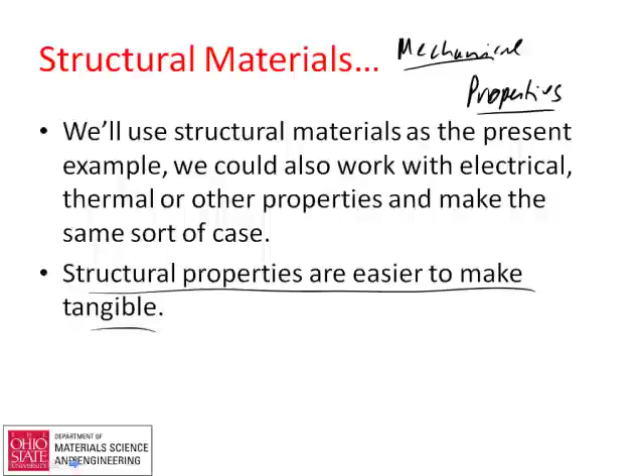Mechanical properties—but we could use other properties too, like electrical properties, catalytic properties, biological response of something. Mechanical properties, I contend, are something everybody has some hands-on feeling with, and as a result it's something you can get into intuitively and extend later on, more like graduate work probably. So structural properties are easier to make all this stuff tangible, I believe, which is why we'll focus on this in this course.

Out of this lecture and the exam that follows, there are really three ways we can define the strength of a material. By strength we mean resistance to physical, mechanical loads on it. There's resistance to elastic deformation—this means, is something stiff enough? Is it going to deform? Is it going to be too floppy, or is it going to be stiff enough? This refers to reversible deformation.

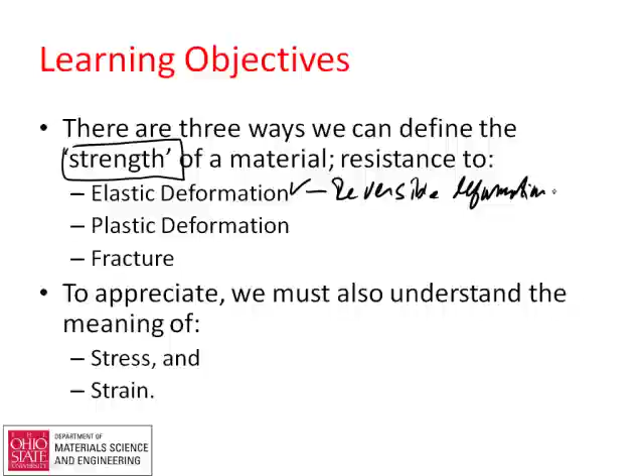The other is being strong enough, which is resistance to plastic deformation—here we're talking about permanent deformation. And then fracture is the other one.

You can see all of these things in the context of something simple like a paper clip. I can take a paper clip and bend it, and if I don't push it too hard—if the wire is very thick, it might be very stiff; if it's very fine wire, or made of plastic, it might be very compliant. If it keeps snapping back to its original position, that's elastic deformation. If we bend it too far and it doesn't come back, that's plastic deformation. Those are two completely different definitions of strength. And the last one you're all familiar with: if you push on something too hard, it's just going to break—that's fracture.

The important thing is these all have different rules that govern the behavior. As engineers, we can write these into quantitative rules, and those rules are different in all three cases. We're not going to get into depth, but I want the idea that elastic is different from plastic is different from fracture. The other thing to appreciate, if we're going to be quantitative about it—and that's what we try to do at the university level—is we have to give real physical meaning to stress and strain, because that's the language we use to be quantitative about any of this.

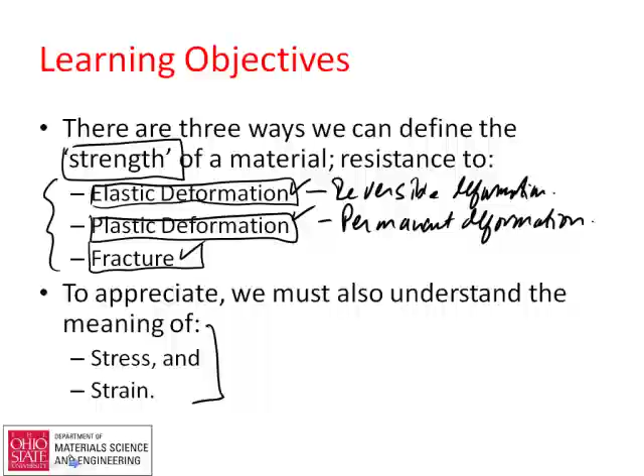Okay, so let's go forward. I want to put this in the context of the 794 class, and develop some goals that build on what we do later. This might seem a little abstract right now, but bear with me, because later on we're going to consider how we can tailor microstructure to give us resistance to plastic deformation—that is, how do we make strong materials? And that's really an interesting topic: how do we make materials strong?

That will be one of the upcoming lectures. The other, I'm going to put into the context of how we make an automobile body, something everybody can relate to.

There's a lot of demands you put on an automobile body. If you want something like a Porsche or a Ferrari, it's got to be really stiff in order to give you good performance. That's not quite as important for a getting-to-the-grocery-store kind of car.

But even for a getting-to-the-grocery-store car, you care that it's crash worthy, meaning it protects the occupants inside if there's a crash. There's a lot of materials properties that go into that.

We also have to have things that are affordable, so manufacturing processes get into that. And we also have to have something that's going to last a long time, so things like corrosion, fracture, fatigue, and all these ways things can degrade go into it.

Something like a vehicle body, which could apply to a bicycle or airplane just as well, brings together a lot of these things, and you can see exactly how the science folds into that. Later on, we'll do another lecture to see how all of this fits together in the context of sustainability.

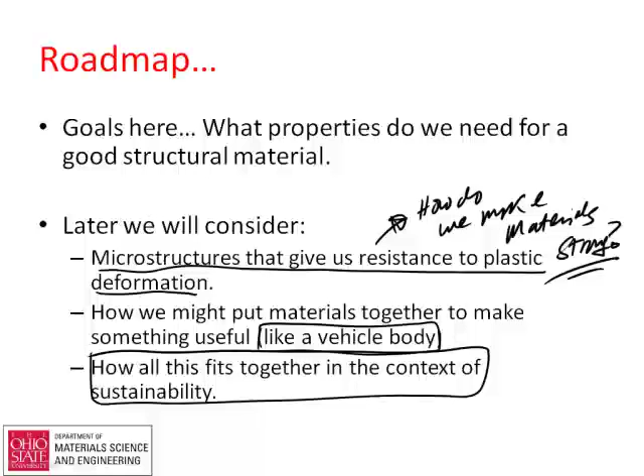One really interesting thing is that if you make a car lighter and lighter, it'll probably burn less fuel, but it also becomes fairly expensive. We'll try to put all of that into a context of sustainability and see how engineering really does treat sustainability in a very first-order way.

Okay, in terms of the goals here, let me do one more slide before I get to that. In the context of something like a vehicle, if you're going to make a bicycle, an automobile, or an airplane, you don't want to carry extra weight around. So for any of these things, a goal is often to minimize the weight or mass of the body while meeting structural objectives—meaning it's stiff enough, not flimsy.

If a shopping cart bangs into it with a light force, it's not going to give you permanent deformation, doesn't dent easily, or doesn't fracture. So failure modes include excessive deflection.

This is really resistance to elastic deformation. Permanent bending is resistance to plastic deformation. And then resistance to fracture is just fracture, or sometimes this is something we call toughness.

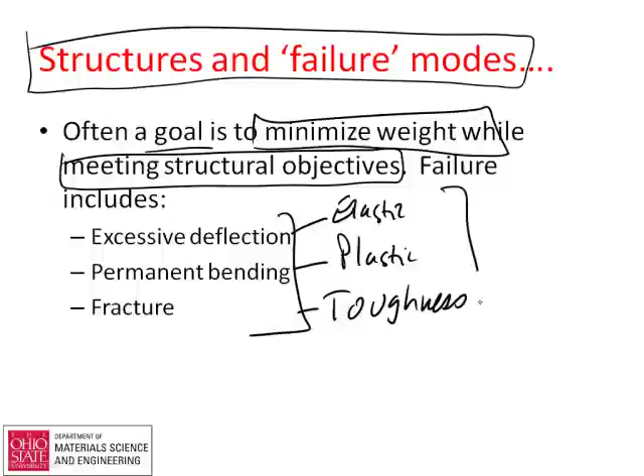You'll see all of these words a little later in the lecture. We'll go through that a little bit more carefully going forward.

My goals with this particular lecture are relatively modest. We could easily build this up—you could do actually several weeks probably on this topic and consider how to minimize weight and how to maximize robustness. There's all kinds of things you could do that I really think are tangible for the students.

If anybody would like to develop something like that, I'd be very happy to get on the phone with you and discuss some ideas where you could do this with different kinds of metal. For example, just to foreshadow this, you could consider aluminum versus steel.

Aluminum has about a third the density, also about a third the stiffness, but it turns out in bending that makes the aluminum behave much better than steel. And also aluminum is something you can buy very easily.

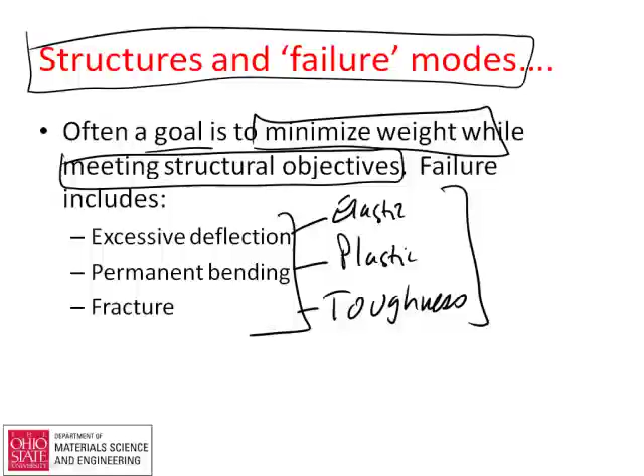If you go to McMaster Carr, you can pick, for example, the thickness you want, you can pick the strength, and usually you can get it in like a full hard temper, and then you can take a torch to it, make it very soft, and you'll see that the plastic properties change a lot and the elastic properties don't. But I think I'm getting kind of way ahead of myself, though I do want to foreshadow some things if you want further information where you can go.

So if you do want further information, I'm going to take you through—I've got a couple things set up on my web browser here, but there are good links. The ASM Teacher's Handbook is outstanding. There's also a Pacific Northwest National Lab Handbook on composite beams. I'll show you where those are.

There are two resources, or there's a great set of resources out of Cambridge University—this DoITPoMS, the Dissemination of IT for the Promotion of Materials Science, out of Cambridge.

I've got two full modules I'll show you, plus a module on a tensile test. Other things you could Google to go further are stiffness and shape, section modulus and shape—there's some really deep stuff there. This would be kind of advanced at the high school level, but I think it would fit very well if you're talking about design or building mechanical stuff at all. There's a lot of great stuff you can really get your hands around. If anybody wants to do that, talk to me offline and I'd be happy to step you through it.

So let's go to Firefox. What I'm going to go through here first is the ASM Materials Education Foundation. If you put ASM Education Foundation into Google, it pops right up. We can go there, and that should also pop right up. If you go here, we can scroll down to educators, go to teacher resources, and there's some pretty good things here.

Two in particular I'm going to point you towards. One is the STEM handbook—this is basically what you get at the teachers camp, and it's available in digital form as well. How Everyday Things Are Made is a really good one. Here's another one from Pacific Northwest National Lab that I'll show you in a second.

Let's go to the STEM handbook first. What we can do is go to composites. Again, this is the same way it's done in the camps: solids—usually metals, ceramics, polymers, composites—is the way it's organized. Go to composites, and in here there's a section on how you make the strongest beam and elastic modulus, and today's lecture basically builds on that content.

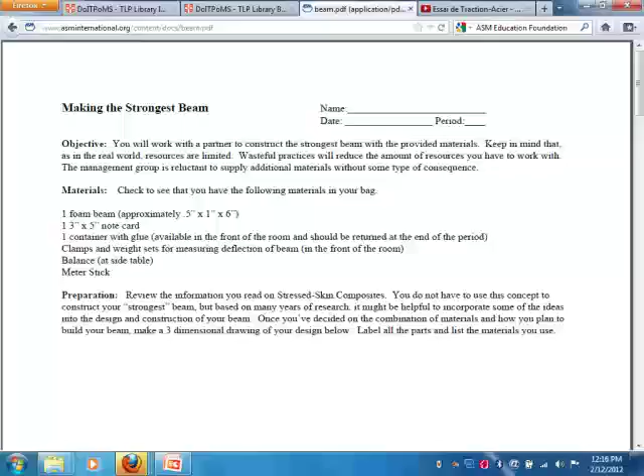That should be loading up any second now. Usually this is a good time to banter with a class—it doesn't work so well at a distance. So anyway, there's this lab on how you can make the strongest beam. This is all written up already.

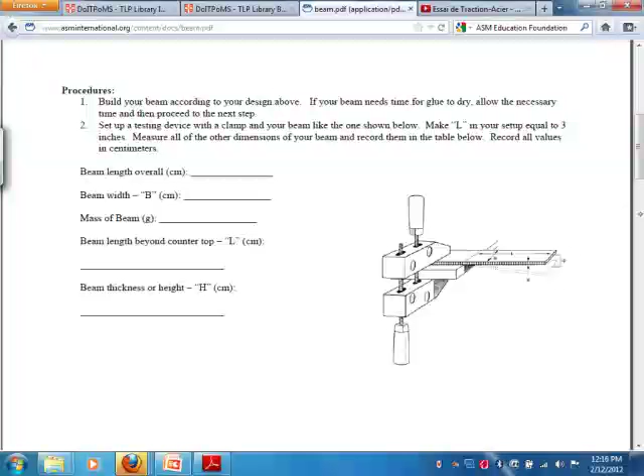Basically you use something like this—I'll show this in a bit. We can look at elastic deflection: if you have a beam like this, how far will it deflect and recover? Plastic deformation would be if it doesn't recover, and we can go through that. Then also at the end of this there's some stuff on stressed skin composites that you can go through as well.

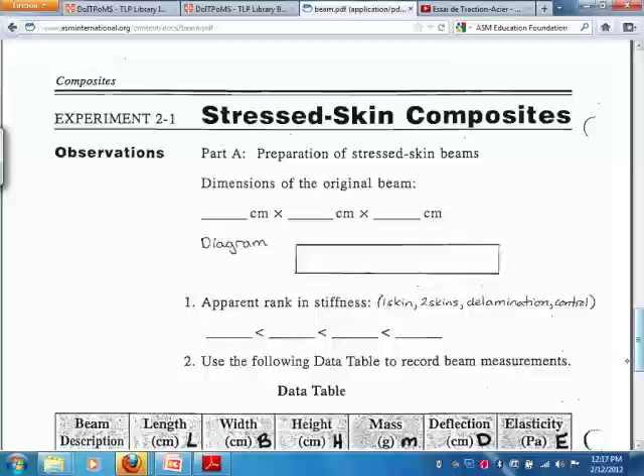So this is pretty good. It doesn't give quite as much background as I will, and there's actually a bit better background given in the Pacific Northwest National Lab set of handouts. If you go to section 8, which I believe is on composites—I just looked at this before this lecture—it does a better job of integrating theory into the experiments, although I think the other book gives experiments that are more practical for typical classes, since that was done more by high school teachers. This one was done by lab guys, and I think you need input from both.

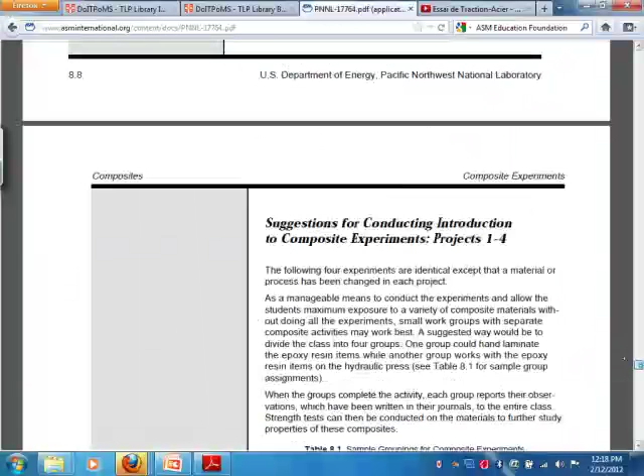So anyway, that's the preface. But if we go down here and look at the table of contents, the important part here is probably composites. Stressed skin composites comes in around 8.16, and we can go down and find that. Where are we at here? Section 8.8—okay, so we can step more slowly through this.

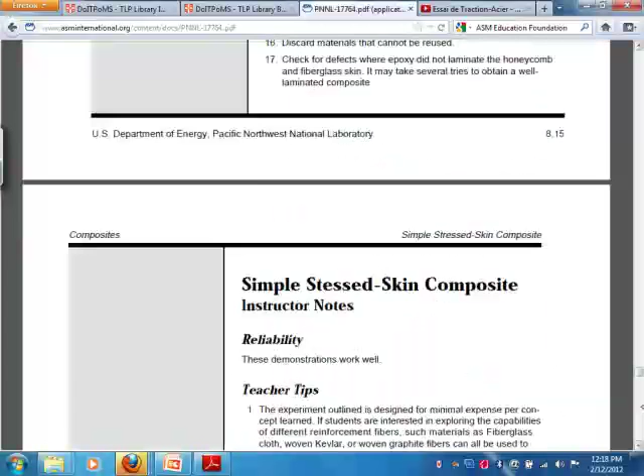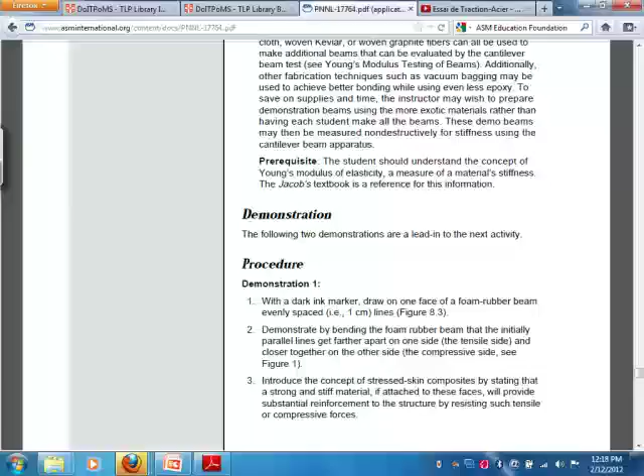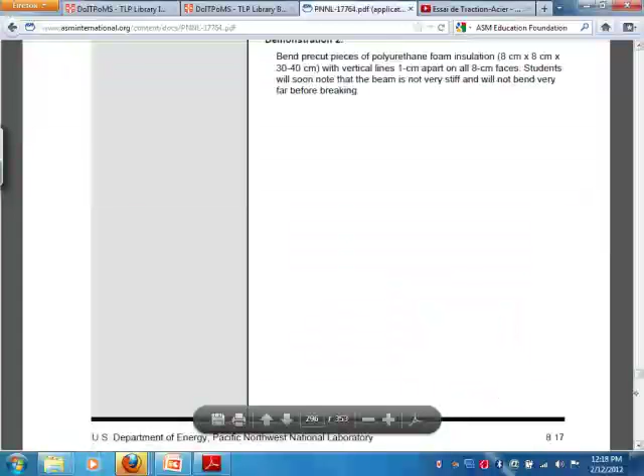Kevlar laminating shows you how to laminate, make fiberglass, and so on. Here's stressed skin composites, with some teacher tips that go along with it. It shows you how to come up with what the stiffness is, what things look like before and after bending, and how the strains develop as a result—these show you the strains that develop. We'll talk about what strain is in a bit in this lecture.

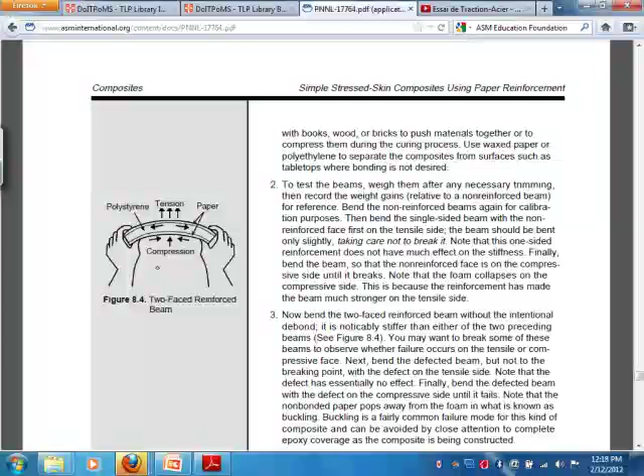It takes you through a lab procedure where you can do this, and basically this stiffness property you get is what we're really interested in when we talk about the stiffness of various materials. That takes you through this. If you can set it up like this, it would be a very good way to do it—with a good clamp, and you could use a dial indicator.

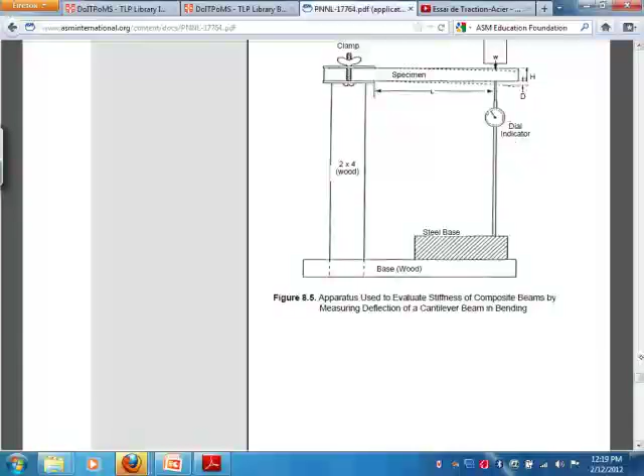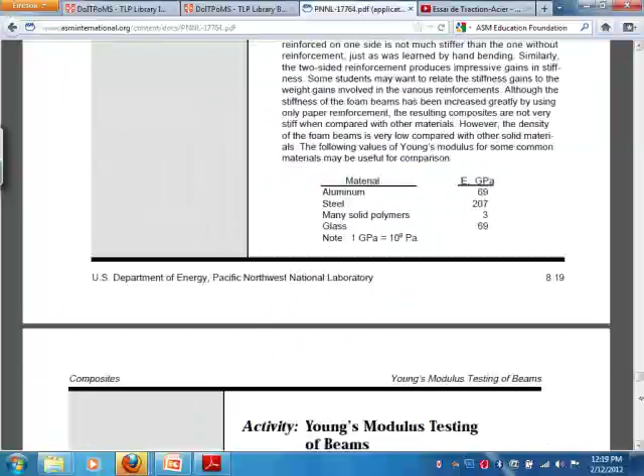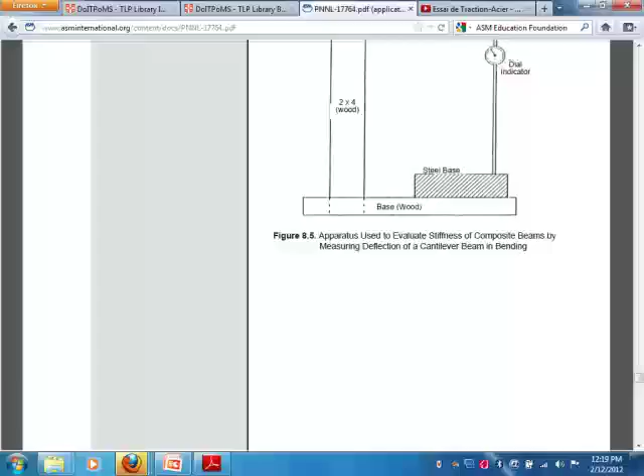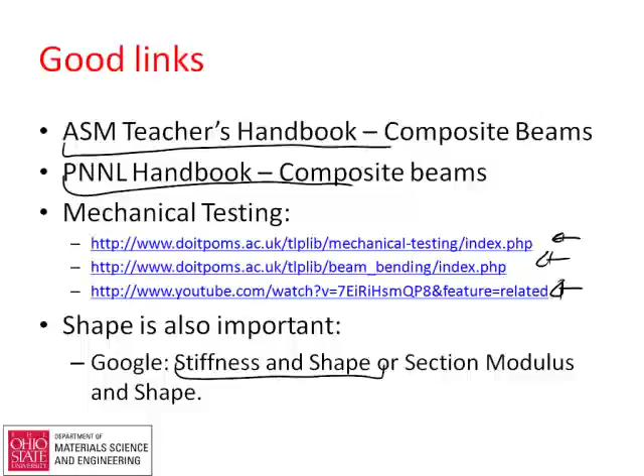Okay, let me go back to the lecture and run through this. Hopefully I just continue recording, I believe everything is still there, so we can keep going. Oh, there's one more thing I want to show you before I get there. Keep recording. The last thing I wanted to show you was an example of a tensile test, and we do this all now. No, there's a couple more things I want to show you.

These are from Cambridge University. This is their dissemination of IT for the promotion of materials science, and they have learning modules here. This one is about mechanical testing, the mechanical behavior of materials, and typically what we do is use tensile testing as the gold standard. I'll talk a little bit about that in this lecture.

Basically, what we do is put a force on this, pull it until it bends and either stretches or breaks. This is a neck forming in a bar, and eventually it breaks there. If you go through this, there's a nice systematic approach they go through, covering the aims. You can skip forward and explore this on your own time, there's a lot more depth here.

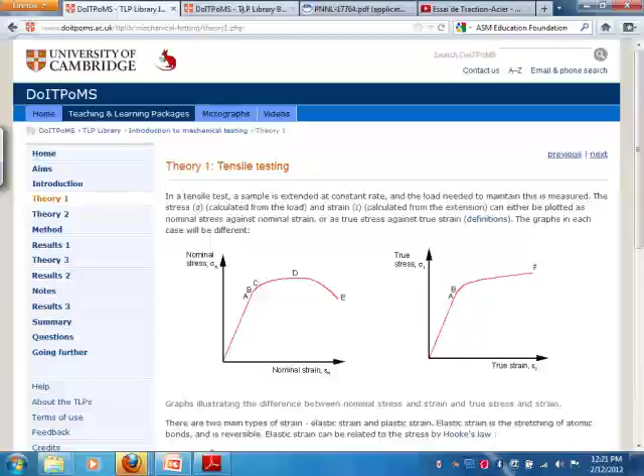This is tensile testing, showing you how you have an elastic range and a plastic range, which we'll talk all about. We also talk some about beams in here, there's another learning module all about beams, which is another good way of showing it. Again, the lab you saw was about beams. If you'd like to develop anything like this, I'd be very happy to talk you through it.

The last thing I wanted to show, also in the PowerPoint, is how tensile tests behave. Here's a YouTube video that demonstrates that. This is 1018 steel, using a force in the up and down direction that's stretching the bar. It's getting longer and longer; this axis is force, and that axis is elongation, and you can see a neck starting to develop in that region.

The beginning of the neck is always at the highest point of the curve, which is interesting. Again, looking at load and elongation, the amount of load it carries decreases as this neck forms, and eventually it will fail right near that neck. You can see the load decreasing and decreasing, and pretty soon it's just going to go pop and break right there. Load on this axis, elongation on that axis, and there it is, broken. So you finally went through fracture there.

Again, lots and lots of great potential teaching material on YouTube.

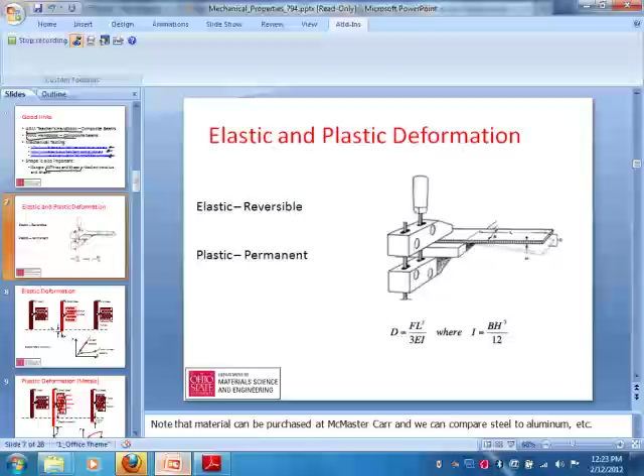Okay, so let me go forward. This is a way you can do a lab like this. Again, what we're interested in is really reversible and irreversible deformation. Well, let's pick a better ink color.

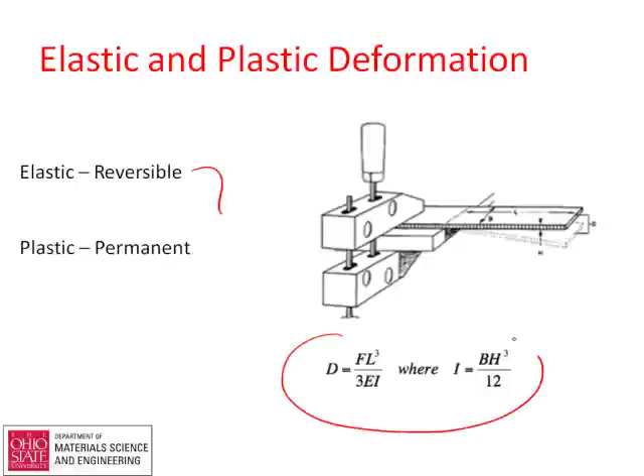Elastic is reversible, and these equations refer to the elastic regime. What this tells you is, again, you could do math with this. D is this deflection. F is equal to the force. L is equal to the length of the beam. E is equal to the elastic modulus. And I is something we call the moment of inertia, just a geometric property here. You see it's B, which is this width - that should be a B.

And then H is this thickness, as it's put here. You see the thickness has a third power dependence. That's basically why aluminum actually acts a lot different than steel at the same weight, because it's a third the density. You get a much thicker beam out of aluminum than steel at the same weight.

And then just a number 12. So you can predict all of this. If you make an aluminum or steel beam, you can make a very specific prediction of how much force will give you how much deflection. And you could do this with steel, aluminum, and so forth, figure out the weight of it, try to figure out how to minimize the weight of a given beam.

And it turns out that composites give you a much better way of doing that than monolithic materials, and shape makes a big deal. Tubes are better than rounds.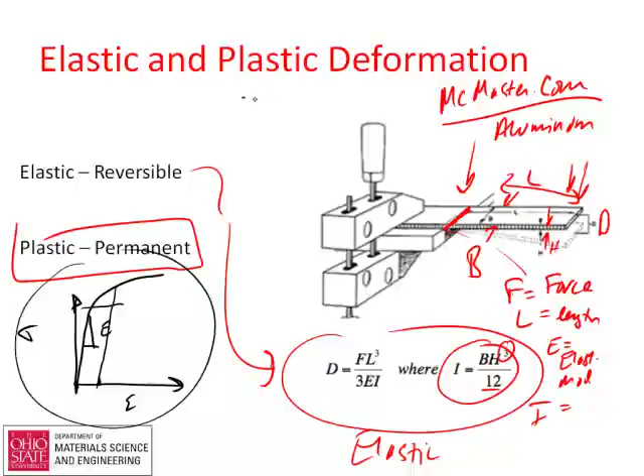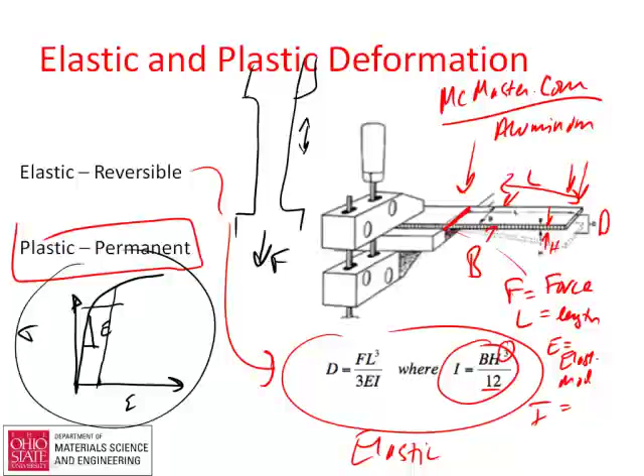Let's consider now what we had in that little YouTube movie, where we got a bar like this, and I'm just going to put a simple force on it like that and consider the force deflection relationship, where the deflection I'm considering is a change in length in that direction as well. Bear with me, it will make sense in a minute - I can imagine it may not right now.

Okay, so here's elastic deformation. Again, the idea here is we have a simple bar, and we're going to pull on it this way. As I take that bar and pull on it, I think all of you, particularly those of you who are chemistry teachers, are very comfortable with the idea that you've got some kind of an equilibrium bond length.

As you put a force on that, you could stretch those interatomic bonds, and that's indeed exactly what's happening during elastic deformation. You put a force on, you cause these bonds to stretch slightly, you remove the load, and those bonds snap back. So this is my force displacement curve, and for something that is linear elastic, that means the slope, the behavior between force and elongation, is linear. Elastic means it returns back through zero. You get something like this, and this is typically what we see with metals and ceramics.

You can do something very, very similar with a rubber band, and it's not really bond stretching that happens - it's a little more complicated. For those of you who are chemistry geeks or physical chemistry geeks, it's really configurational entropy that's going on. You get this nonlinear elastic behavior.

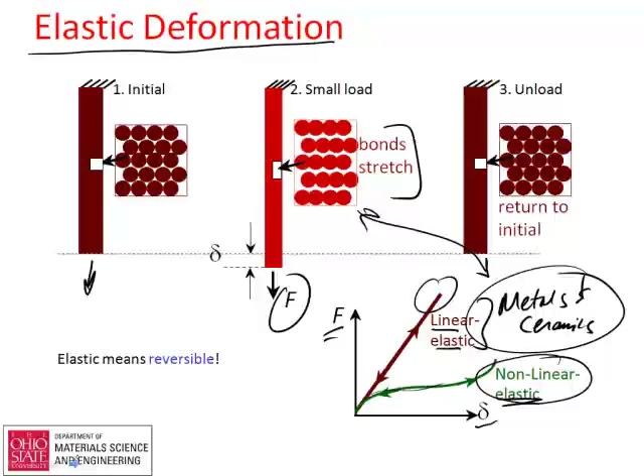Nonlinear means it doesn't follow a line, and elastic means it's reversible. The important point I want you to get right now is that for metals and ceramics, it's this interatomic bond stretching that gives us reversible behavior. That's a big deal, and we'll find out that plastic behavior works very differently, but this elastic behavior is all based on interatomic bonding, which is the main domain of chemistry.

So if you take this bar, imagine I'm pulling on it, and I pull on it a lot harder, at some point you're actually going to sever these bonds, and you're going to have material slide along each other in such a way that it makes this bar longer, and does so in a permanent way. Our word for permanent is plastic.

So this is elastic and plastic deformation. I've put permanent set in it. If I load, this is the loading part, and then I unload, you see I'm getting this permanent deformation in the material. That's what we're talking about, plastic deformation. So the mechanism is different than what we had for elastic deformation.

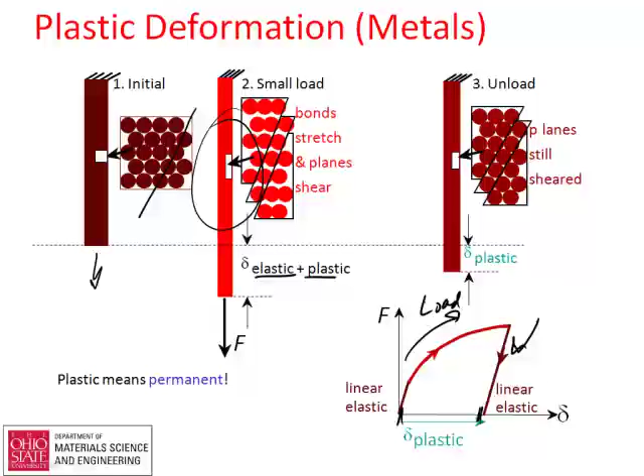When we did elastic deformation, it was simply bond stretching. Now when we're doing plastic deformation, there's bond stretching and there's actual motion of atoms past one another. That's what we call shearing, and that shearing happens in response to a shear stress. I'll brush over that briefly, but you'll hopefully get the key ideas there.

Geometry is a big deal in all of this, and we're not going to have nearly enough time to get into how to do this in great depth. There is great depth. This can be done, it's a fascinating field, and it's really a part of a subdiscipline of partly materials and partly mechanical engineering that get into all this.

Let's imagine I've got a load, 50 kilograms, or about 100 pounds, and put it through a thin cotton thread that can cause that thing to fail. I could also increase the cross section, take a whole bunch of threads, turn that into a rope, and that can hold that 100 pounds very easily. So that just shows that shape and size matter. Nothing that we don't already know, right?

Let's be quantitative about that. The thing we've changed is both materials might fail at about the same stress. So stress is really this kind of intensive property that determines what goes on. We like to speak in terms of stress and strain, because stress and strain are really geometry independent, whereas what force does depends on the geometry of the system.

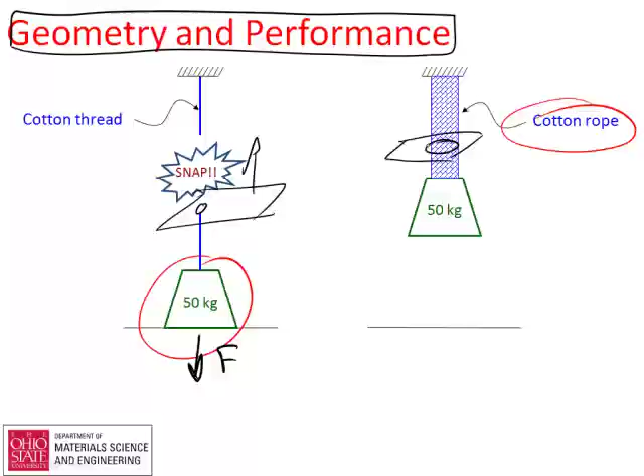So engineering stress, going back to this, pull on this. The important thing is we're putting a force in that direction on this thing, and the area that this breaks over would be this area normal to that plane. So we've got a plane defined by the same direction the force is on. It's that area normal to that matters. There we've got a small area, here we've got a big area normal to that.

Normal stress is basically the stress perpendicular to the plane. So this would be the force, this might have that mass pulling in that direction. The normal stress is equal to force over this area that's perpendicular to that, and we usually give that the Greek symbol sigma.

Turns out, even in something where you're putting a normal stress on, you can find shear stresses. If I'm pulling something like this, and draw my coordinates like that, don't worry too much about this, there's shear stresses that act on the body as well. We can get into the stress analysis, but the important thing is we can also define a shear stress.

A shear stress is given the Greek letter tau. Tau, again, is simply force over area, but now the force is going this way. This plane that we're interested in is really parallel to that force direction, so we're worried about that area that's parallel to that. That's what a shear stress looks like.

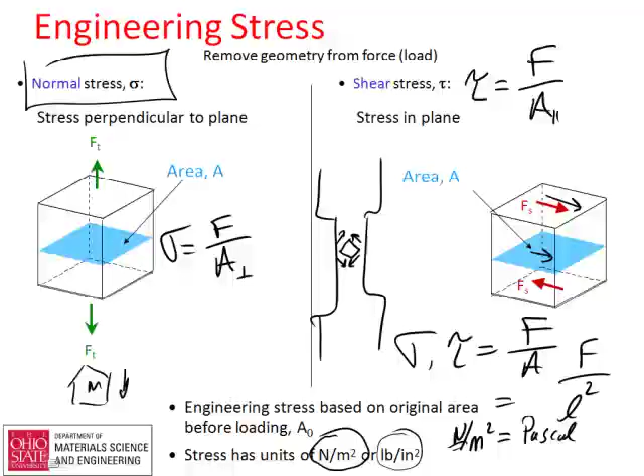We can do strain as well. Again, stress and strain are things that appear in the ASM camp.

Longitudinal strain: if you take a bar like this of some original length - this is my original length - and pull on it like that. Longitudinal strain, we give it epsilon, is basically delta L over L. Keeping with the same nomenclature used in the slides: change in length divided by initial length. It turns out there can also be a little bit of lateral strain where things move sideways, but let's not worry about that right now.

The other thing we can do is see that if you shear something - if you start out with something drawn on as a square in that orientation - after this deforms, it'll distort to a shape, exaggerated like that. It'll get longer in this direction, so this is really the tension direction, and also turn that into a shear strain. It turns out there's a shear strain if you do the math right, and that's also shown by this angle of distortion. I think that's something you're not going to get into with your students, so let's not worry about that too much.

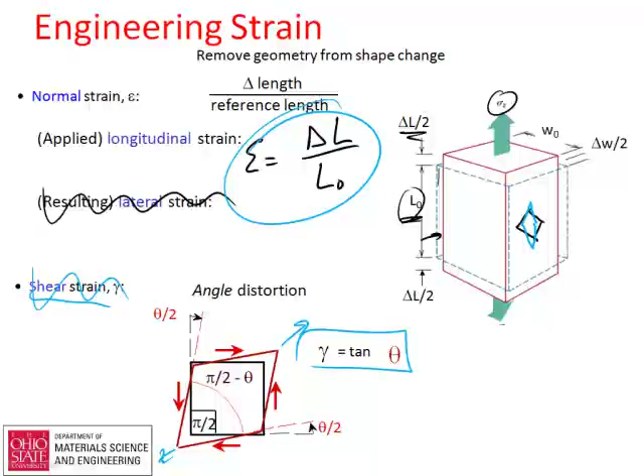So again, let's get back to reversible deformation. Now we can put numbers behind it. Again, this is my initial shape - put a small stress on it, we stretch these bonds in this direction, we unload, we go back. Now we can put a number on this, and we can say that the elastic modulus is equal to stress over strain, which would indeed be the slope of this thing. We can use that to compare one material to another. Elastic modulus is something we use in mechanical design all the time.

Elastic modulus and strength, elastic modulus and shape, determine how stiff a material - or a shape made out of material - is going to behave. So if you make an I-beam out of aluminum versus steel, you know what that shape is, you know what the material is, and you can figure out what the stiffness of that beam will be in bending very accurately. It turns out the more you can move the material out to the outsides, like you do in an I-beam, the stiffer that is for a given amount of material. So we like to do those tricks all the time - we make beams and hollow tubes and all that. It gives us great mechanical advantage.

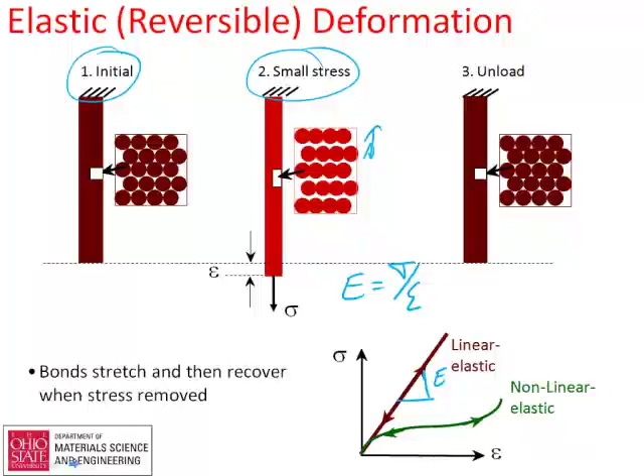So here's our linear elastic properties. Again, this is your elastic modulus that can go - this is tension over here, this is compression over here.

As the material elongates this way, it tends to suck in that way — that's governed by Poisson's ratio. Let's not worry about that right now; let's just focus on elastic stiffness. So the higher the modulus, the stiffer the material is.

Just to put some numbers on it, the elastic modulus of iron is about 30 million pounds per square inch, which is equal to about 210 gigapascals. You'd work through the units — stress has units of force per area, while strain is dimensionless, so that's why we have stress units here. The modulus of aluminum is about one-third that of steel, about 10 million psi, which equals about 70 gigapascals.

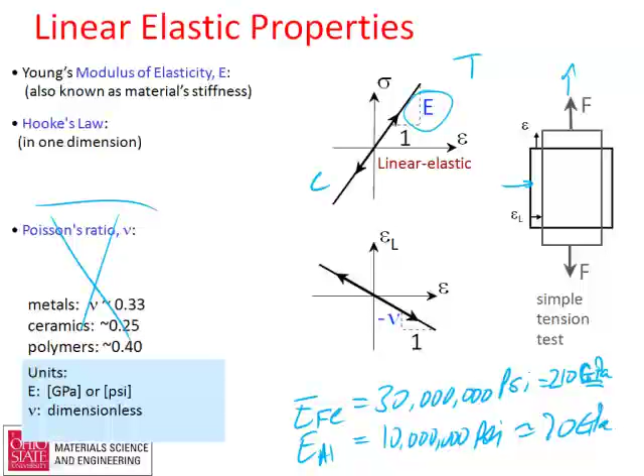Okay, let's continue — properties from bonding. For those of you who are chemistry-minded, this is directly related to interatomic bonding, like the plots of potential energy versus interatomic distance you've probably seen. This is really the bonding energy. r0 is about the radius, and for most metals the interatomic spacing is about 2.5 angstroms, so the radius would be something like 1.25 angstroms, or maybe 1.25 angstroms.

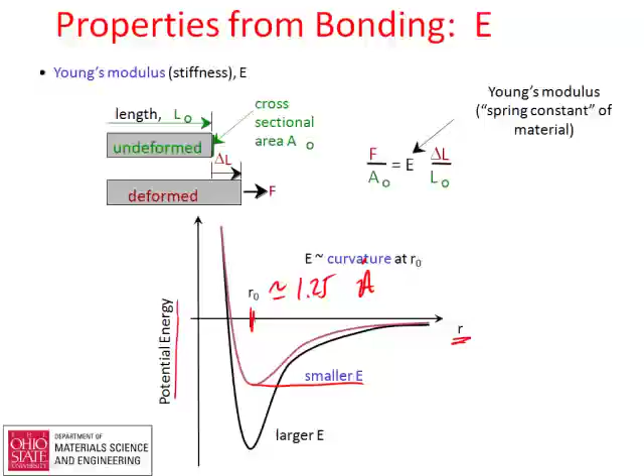Since that radius is about the same across materials, it turns out it's the curvature that matters — the stronger the bonding, typically the higher the modulus. So things like tungsten are very, very stiff because they have very high bond energies, and indeed they are. Aluminum is not so stiff. Graphite has very high bond energies, and so does diamond, which makes those materials have very good elastic stiffness, because it all comes back to the bonding. We could be quantitative about that, but in this course we're not going to.

Here's a plot, one of my favorites — logarithmic scale, going from very low, 10 times greater, 10 times greater, up the way. Some of our toughest or stiffest materials are things like tungsten. Those with lower bonding energy, like magnesium, are much lower. Polymers are generally much lower. This is because, as we'll discuss later, you can have covalent bonding along the chains, which are very strong bonds, but these chains are usually held together by secondary van der Waals bonds.

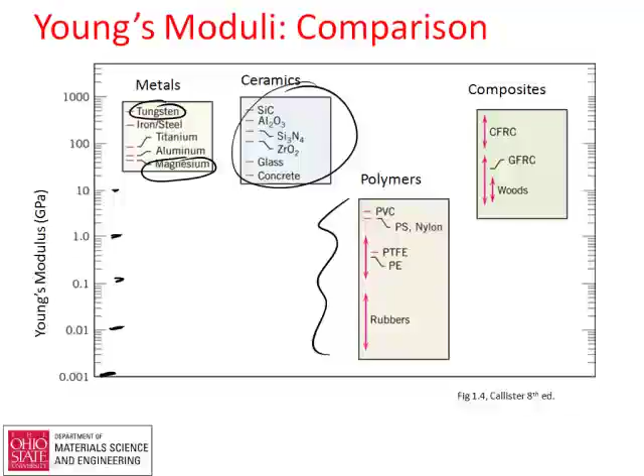As a result, polymers don't show great stiffness. Ceramics have ionic and covalent bonds that are very strong, so you see very high stiffness. Composites fall somewhere between, since they often involve a lot of polymers, so you don't see quite as high a stiffness. What's incredible is that engineering materials span about 5 or 6 orders of magnitude in stiffness. Materials down here are very floppy; materials up here are very stiff. Floppy materials are often good for biomaterials, where you want compliance to match skin or soft tissue. Up here, if you want to build a bridge or something structural, you don't want it to deform. Metals and ceramics are really good — it's a huge range.

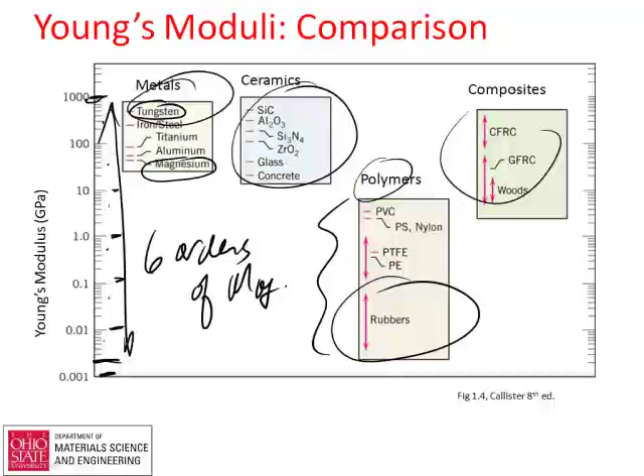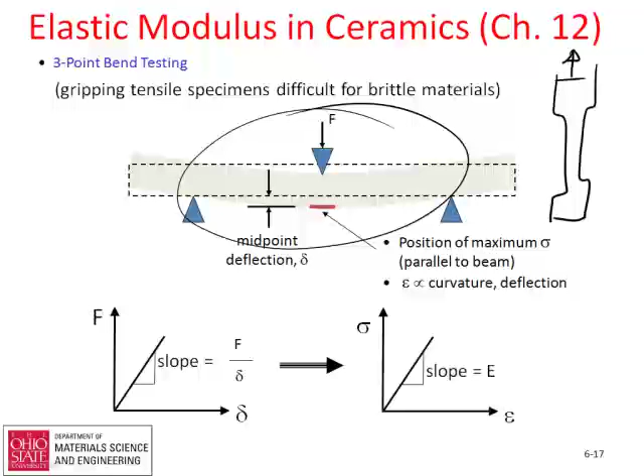So measuring moduli in ceramics, we typically do this in 3-point bending rather than tension. Partly this is because it's very difficult to take tensile bars — if you make something axisymmetric or flat and try to pull on it, it's hard to do the alignment carefully, which you need for brittle materials. It's much easier to do in 3-point bending, so that's a good way to measure stiffness and strength of brittle materials. We won't go through this in too much depth here.

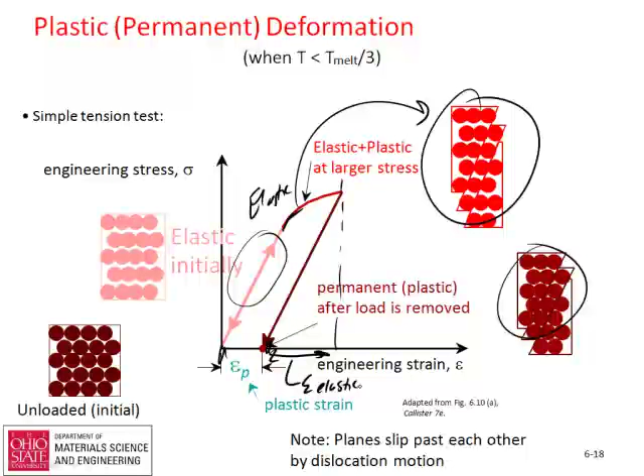Plastic deformation we typically measure with a tension test. We can load this up — initially this is the elastic regime. You see this bending over once the atoms start to shear past one another. Then if you unload, the elastic stretching is gone, but you see permanent deformation — that's plastic deformation. From here to here would be your elastic deformation.

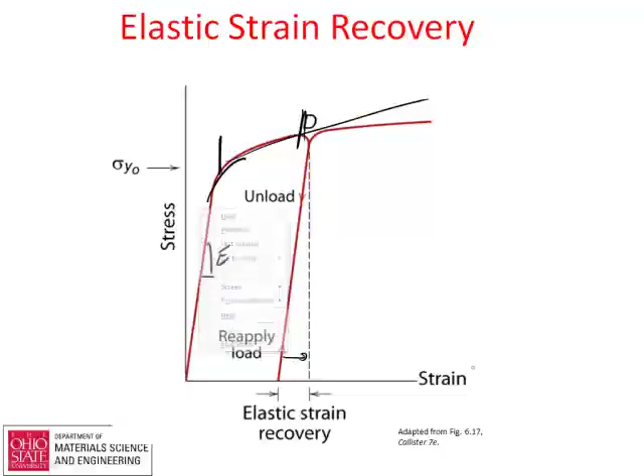This is what we would see — a little less cartoony, but about the same idea. Usually these elastic slopes represent your elastic modulus, and the elastic slope is much higher than the plastic slopes, with a real abrupt turnover there. The strain here is provided by atoms sliding past one another, while this strain is provided by atoms stretching. The elastic strain is usually less than about 0.5% or so in metals — it can't be very big, because things will start to break or deform otherwise. This is sort of typical.

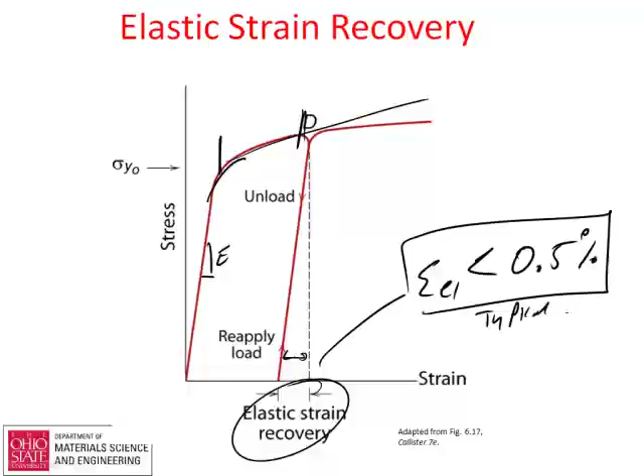There are some other examples where you can break that, but those aren't typical examples.

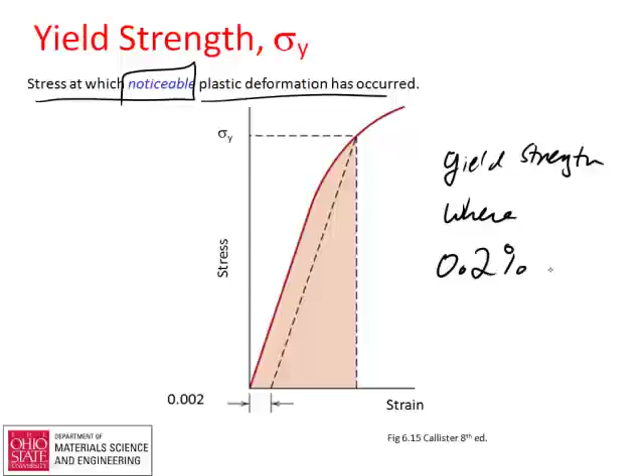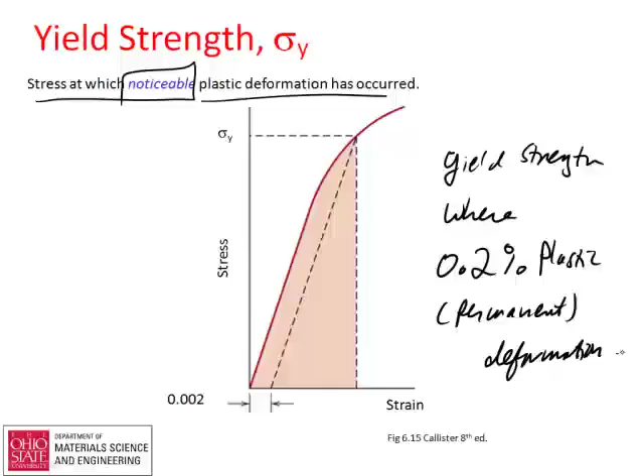One of the things we define very carefully and use as a standard in engineering all the time is the yield strength. The yield strength generally is the stress at which noticeable plastic deformation takes place. To make it so that most labs can do this in an easy way and agree on what that means, we define yield strength as where we see about 0.2% plastic or permanent deformation. That's our definition of yield strength, and we can measure it that way.

What we also see in materials, and this is something we go through quite a bit in the ASM camp, is that as you deform materials, or metals in particular, they almost always get harder. If you do a tensile test, just like in that YouTube video we talked about, you see materials get harder. Stress is equal to force over area, so the force required to keep forming this material increases. This is strain on this axis.

This one has small hardening, this has large hardening. Materials with a lot of hardening turn out to be materials you can stretch a long way, and we like to have these high strain hardening exponents. We try to put this into a mathematical form - a common empirical form. By empirical, I mean there's no reason it has to be that way; some guys just said this equation fits pretty well, and it does. This n is what we call the strain hardening exponent, and generally more formable materials have higher strain hardening exponents.

By formability, I'll talk about forming in a second in a bit more depth. Actually, let me go back and talk about this - forming has to do with how far you can stretch something.

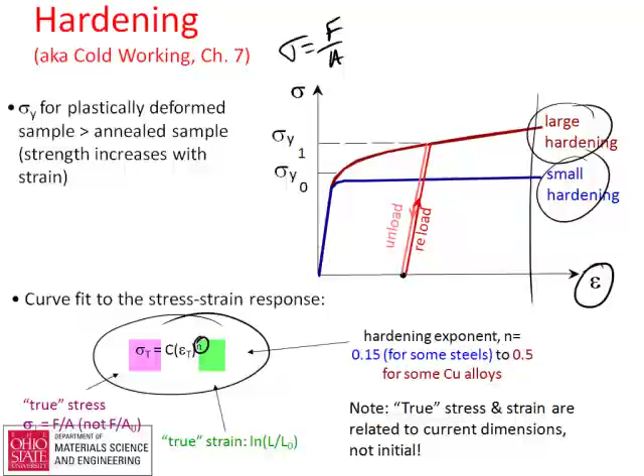If we think about how an automobile is made, for example, you end up with a piece of steel that's rolled, looking something like a good old Reynolds wrap you might pull out of the drawer. Then you put that between hardened steel pieces shaped like the fender you want to make, and you basically impose that shape onto it. The material has to stretch a lot to do that, and it has to stretch without failing. These hardening properties have a lot to do with that, and that's what I mean by formability. This gets into what we'll talk about later regarding automotive design.

Tensile strength is the other important property. Basically, tensile strength is the maximum force divided by the original cross-sectional area. Force over original area is engineering stress, so this becomes tensile strength - that's the highest. If you know the cross-sectional area, you know your tensile strength, and you can calculate the highest possible load that component could carry in tension before it ends up breaking.

In metals, this is usually where noticeable necking starts. In ceramics, it's where crack propagation starts. And in polymers, it's where you start breaking these individual covalent chains.

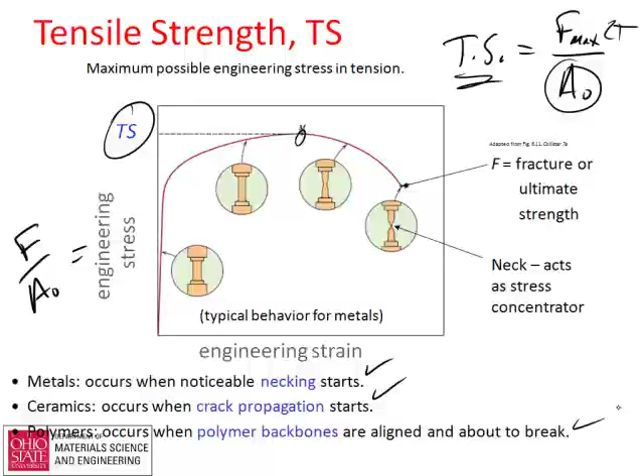We can also measure the strength of ceramics. Basically take the same sort of arrangement, measure force, measure midpoint deflection. We can calculate the stress that exists at this point where a crack starts to come in, and you can see it just cracks all at once - that represents the tensile strength of the ceramic.

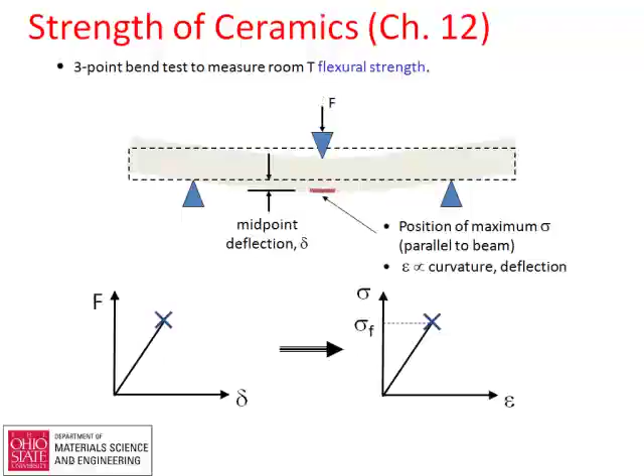So we look at tensile strengths. Metals, again, are usually the winners - we can make steels and titanium alloys that are very, very strong. Composites can also be very strong. For ceramics, the key to strength is actually minimizing flaw size, because they fail by fracture, and if you've got large cracks, that will cause them to fail more quickly. Polymers generally do not have very high strengths, so we mix them with carbon fibers to get high strength, and that's how we go from polymers to composites if we really want strength out of them.

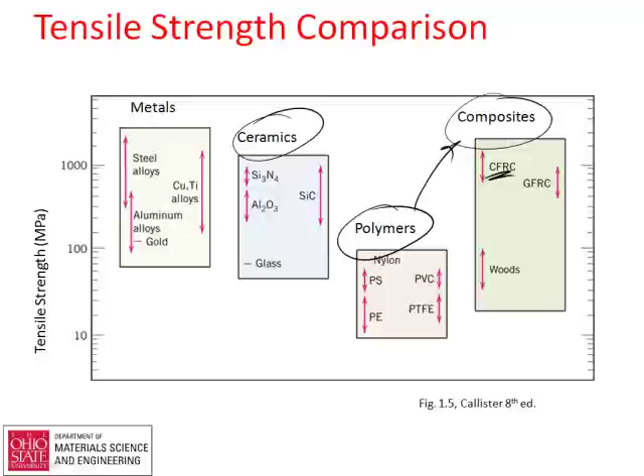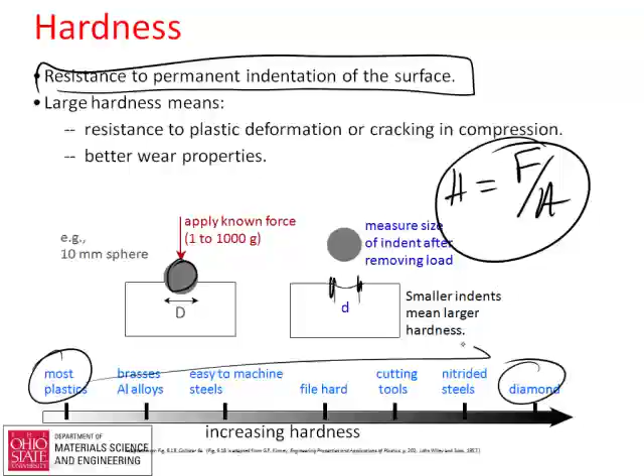Hardness is basically a resistance to permanent deformation of the surface, and this is a quick test that tells you about how strong a material is going to be in tension. Basically what we do is we take a very hard steel ball or a diamond, apply a known force, measure the size of the indent, and the hardness is again related to force over area. Plastics are very soft, diamond is very hard, things are in between, and this is a simple way we can measure that. But there are other ways too.

There's something called the Mohs hardness scale, where you can see what material will scratch what material, and it turns out a harder material will scratch a softer one. Diamond will scratch copper, copper will scratch chalk, but not vice versa. So you can actually rank materials that way too, and that's also a measure of how easily things are indented. You can use that as another simple measure of hardness, even in a classroom environment with very little money.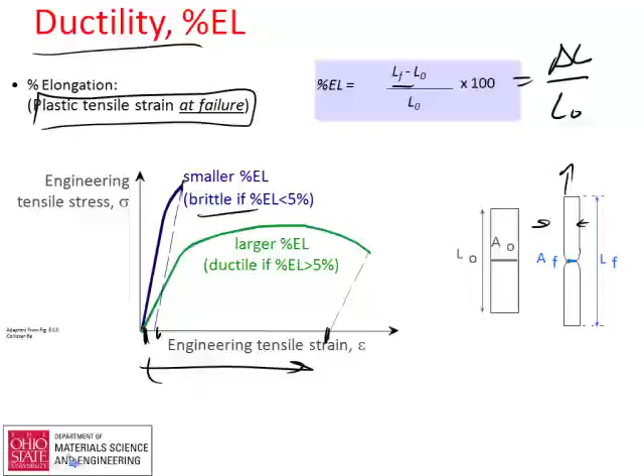In this lecture, we don't have enough time to do fracture mechanics any justice whatsoever, but I do want you to recognize that it's a different mode of failure than either elastic or plastic deformation. It has its own quantitative framework associated with it, and materials that can plastically deform easily are generally very tough. That's about all I'm going to say about that.

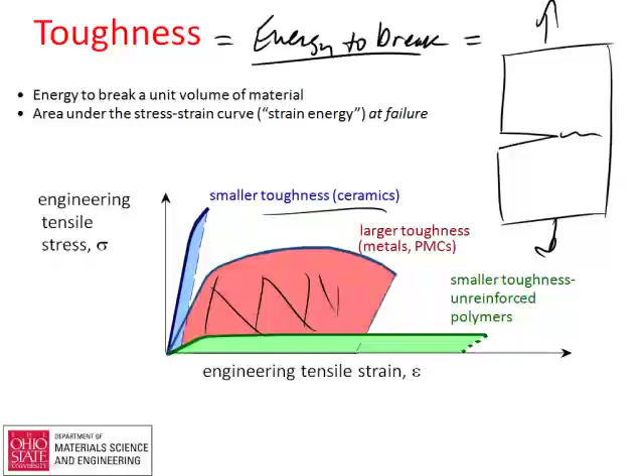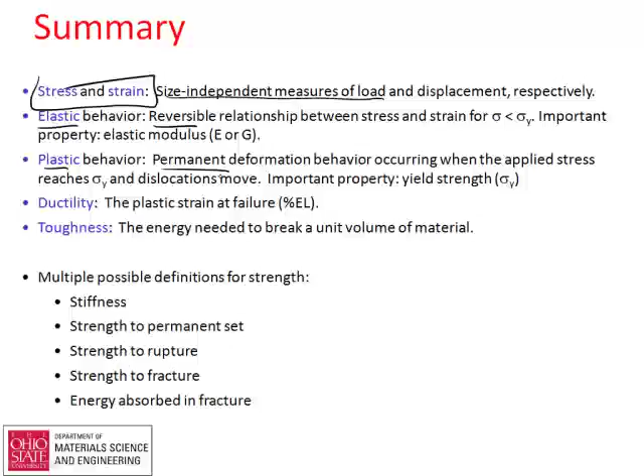So in summary, stress and strain are two things we like to use because they're size-independent measures of mechanical properties. Elastic means that things are reversible. Plastic means deformation is permanent. Ductility is the plastic strain you get at failure. Toughness is the energy required to break material. Things like steels and titanium alloys are generally very tough, whereas glasses and ceramics are generally very brittle, which is the opposite of tough. There are many possible definitions of strength, and we have to make sure we're talking about the same language.

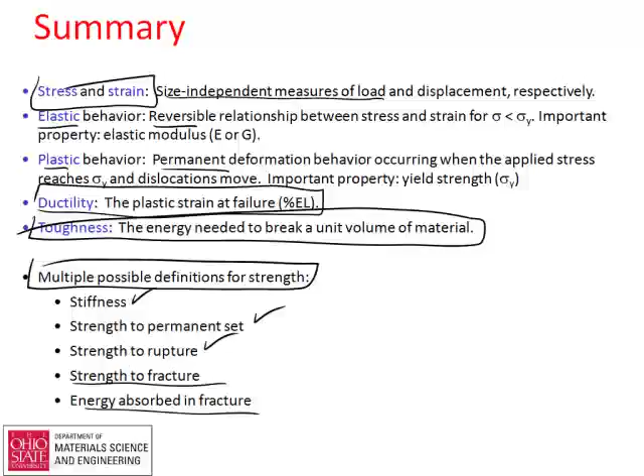Stiffness is resistance to being floppy. Strength is resistance to permanent set. Things might rupture over time at high temperature, beyond this course. Strength at fracture can be important. Energy absorbed at fracture can also be important. These are all alternate definitions of whether something is suitable for the right kind of mechanical loading. So if you're designing an airplane or a car or a seat somebody might sit in during a crash or something, all of these measures can indeed be important in design, and they are things I think that can be kind of accessible also.